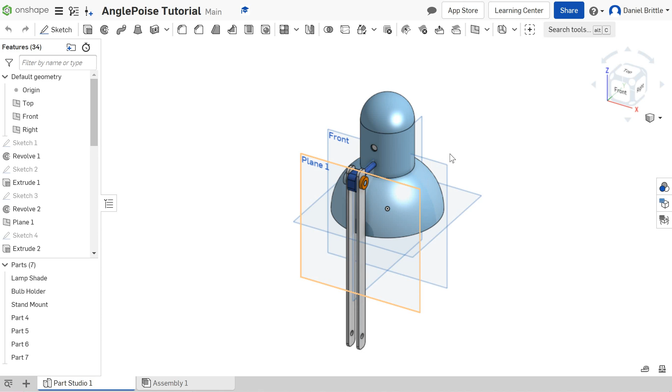In this tutorial we're going to look at creating a lower half of the stand and the attachment that goes onto the base. So to do this, what we're going to do is look at this work face here. So on the side, the inside of the bar that you've already created, we'll create a new sketch and we'll look at it from the left hand side. So if we zoom out a little bit, we'll have the space to create this.

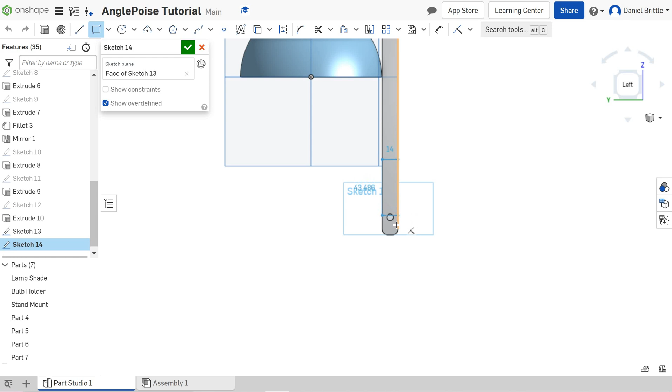Now I want this to be quite restricted, so we're going to draw it within this block. If we then deselect, so right click and escape the rectangle, we can move this lower line out of the way. So we know it's going to become lower, and that way it's going to mean that we have to add less dimensions. So we've managed to snap to these sides on all parts, okay?

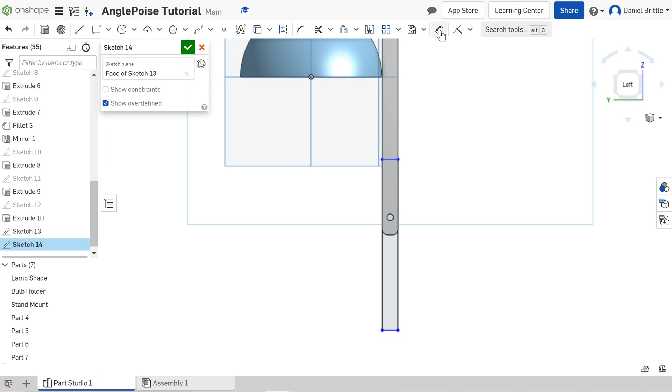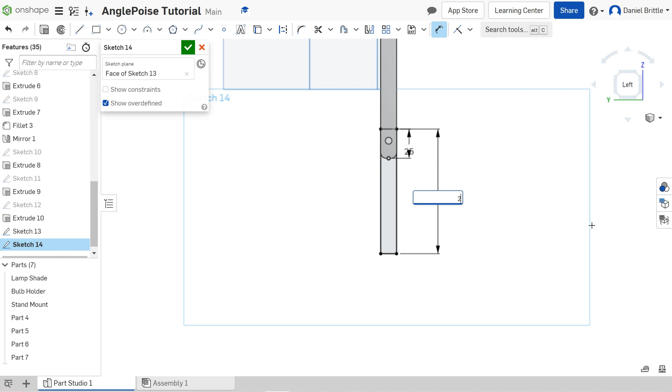So dimension, the distance from this line to this line is going to be 25 millimeters. Okay, so we can see it's just overlapping at the top there. We're then going to make this line here 250 millimeters, and then we just need to put our holes in to match what's already there.

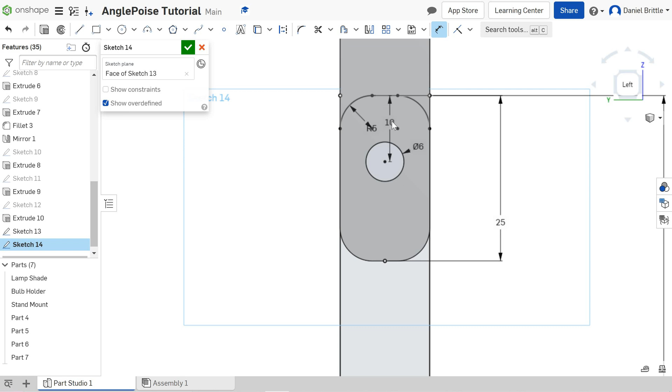So if we zoom in, we're drawing that one and we're giving it the diameter of 6, as with all of the holes on the stand, and whilst we're up here we're going to fillet these top parts. The fillet is 5 as well, so we don't want to change that. Saves us adding the fillets later on, so we're doing it during the sketch. Right, and I just want to check the dimension from the top to there is 10, which is exactly what I wanted.

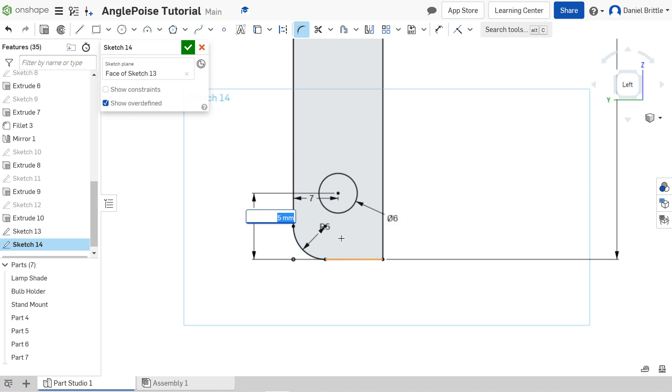Okay, so zooming out and zooming back in towards the bottom here, we're going to draw it the same. So dimension 6 millimeters. There was nothing to snap to, so there's a few more dimensions needed. In the center, which is 7, and then we know it was 10 from the bottom. Using our fillet tool again, click, click, click, so 3 in a row, and then press enter on your keyboard, just making sure they are 5, and you can change them there if you want to later on.

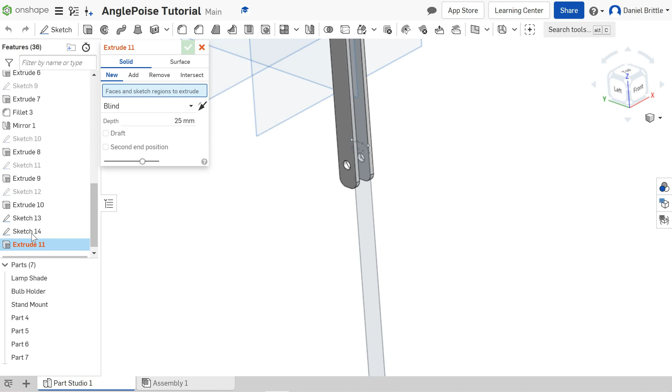So that's now done. I'll finish that sketch, look at it in 3D and zoom in so I can check that my extrude is going to be in the correct position. Extrude, I want sketch 14 extruded, and we can see in there it's going way too far at the moment. We need to change that to 10, and that's the distance of that center part. It's a new extrude, so it's a new part. And click tick.

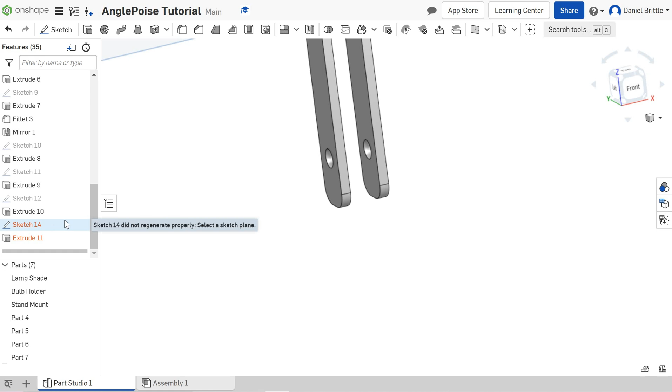You can see I've got an old sketch here as well. It looks like I don't need that, so I'm going to delete sketch 13. It's trying to look after my timeline. Apparently I did need sketch 13, so let's Control and Z on my keyboard and bring that back in. I'm not sure which one that's working to, so that's something for me to investigate later on. At the bottom now, so we've got that as a new part created. You can see our stand starting to come together.

So before we move to create the bottom attachment, we're going to pattern the nut and bolt downwards. So just as good practice, I'm going to name them in this list. So we've got top bolt and part 7, top nut. We're going to create a linear pattern.

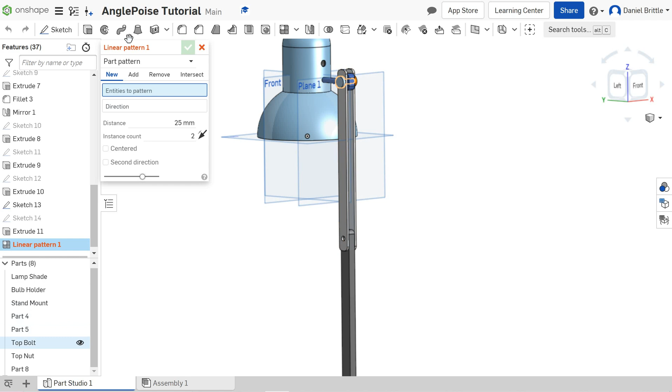It's for a part pattern, which is fine, top bolt and top nut, and the direction, any line going in the correct direction, which is here. If we look at it from the left, we can make sure this is lining up right. I'm going to click the arrow because I want it coming down, not going upwards, and I'm going to guess at the moment at around 200 millimeters.

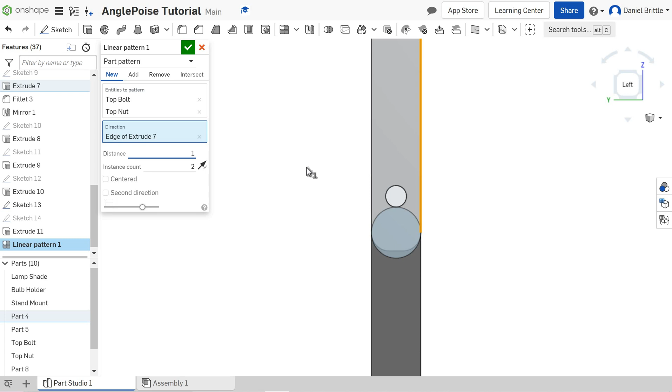So you can see I've missed very slightly, so I reckon that could be around 190. A little bit of trial and error, and that looks like it's spot on. So I'll just check both sides, and it's going through absolutely fine. Tick. You see that you've got the pattern creating that just down here in part 9 and 10. We're not going to do that for the bottom because the bolt's going to be very slightly different.

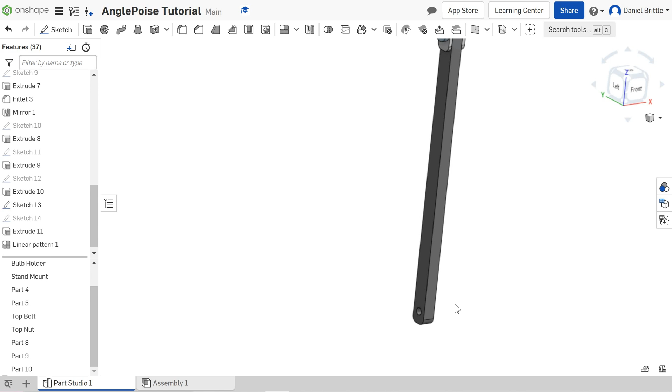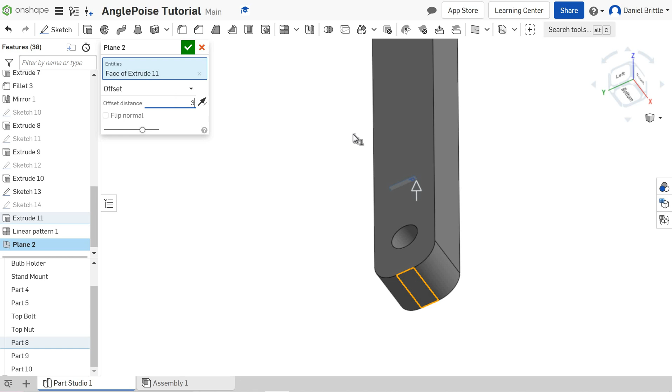We've got to now create the attachment. So to do this, we're going to create a new work plane. We're going to do it about 30 mil above this circle. So it's not too big, but it's enough to play with. So click on work plane. We're then going to offset it from this face. That's our flat face. And we want to go upwards, so we're going to need to flip the arrow, and we're going to go 30 millimeters. Click tick. Our new sketch then is going onto that new work plane.

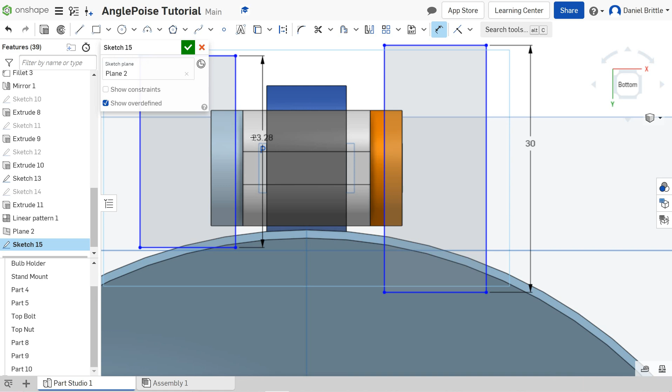We want to look at it from the bottom so it's a bit easier to look at, and we're going to just create two very basic rectangles. So first one on this side, making sure it's not snapping to anything, and then we can dimension them as well. So if we make this 30 millimeters, keeping my dimensions memorable, that 30 millimeters, and then we want to distance it from this edge, so we want them to be touching, so we're going to make that 0. I'm going to make this one 0 too.

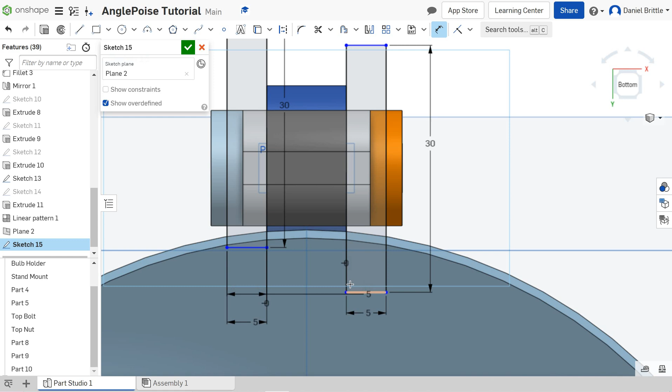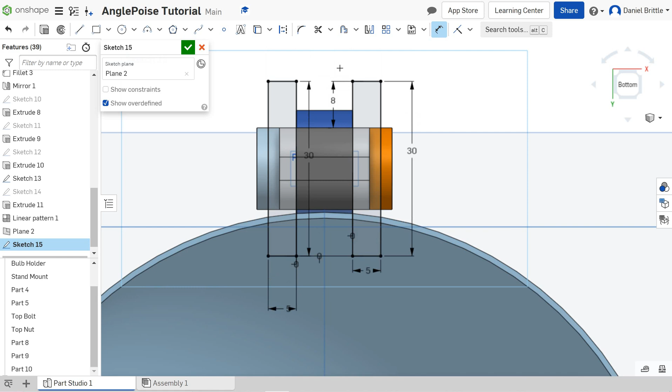The width of these is going to be 5, a nice strong stand, and then we're going to make sure that they line up this way as well, so the distance between them two should be 0. Okay, the only thing now to do is to make sure they're central on their distance from this bar. So we knew that the bar is 14 thick, so we're going to balance that distance out. So 14 off 30 is leaving us with 16, and we halve that to get 8. So that makes sure they're in the centre. We're going to finish that sketch there. So just two well-dimensioned rectangles.

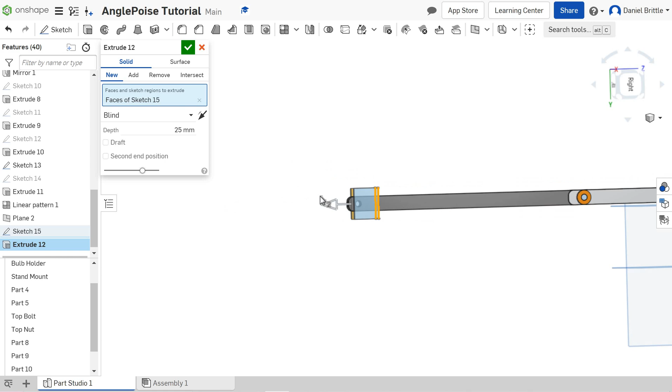We're then going to extrude those as sketch 15, and you'll notice it's going to create two parts. When we click new, they're going to be different colours. It's going to be two parts, which isn't ideal, but I'll show you how to get round that a little bit later on. So that's not far enough at the moment. If we look at it from the right plane, we can see it's not even coming past the bottom. We want a little bit of clearance on there. So if we go 25 millimeters, you should see there's a little bit of clearance, and we can be happy with that extrude. We can come back to add the holes in at a later point.

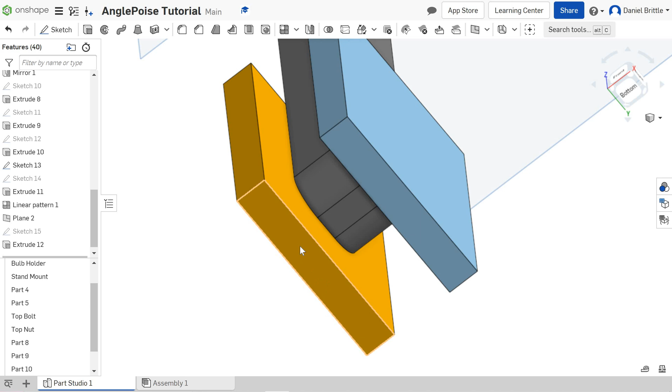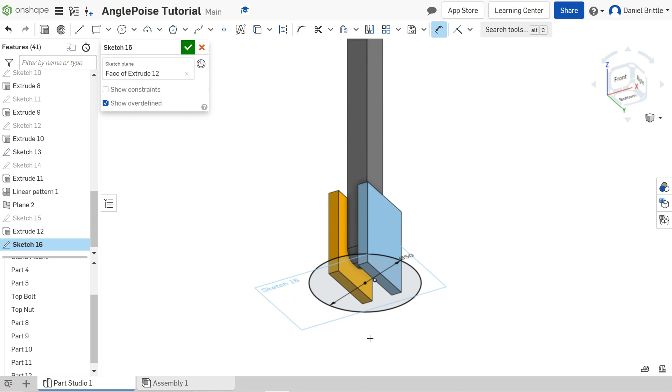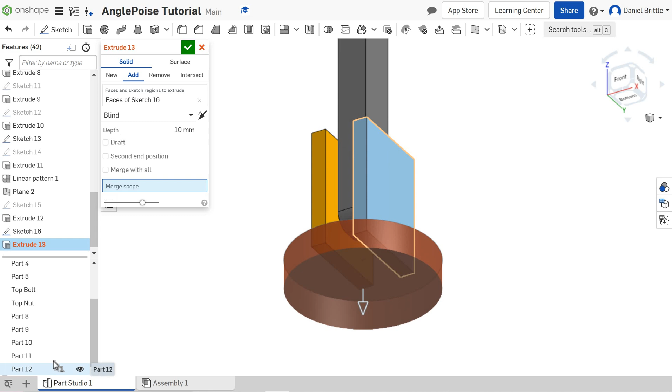We're now going to create on the bottom face a new sketch for a circle, and look at it from the bottom as well so you know what it's going to look like. We're going to go from the center here, a big circle, and we're going to dimension that at 50 millimeters. Okay, and then let's go back to our isometric view and zoom in. Finished that, extrude, and we're going to make that exactly the same, 5 millimeters. In fact, let's make that bottom a little bit chunkier. We're going to make it 10 millimeters, and we've got to tell it that it's sketch 16 that we want. We want it to add to one of these parts. It doesn't really matter which at this stage, and we'll click tick again.

We now want it to know that all of this is one part, so we need to join part 12 and part 11 together. So we'll highlight both in the parts list, right click on them, and we're going to go to Boolean. Okay, that's going to join them. So we've got union, we've got subtract, intersect. You can use it for all sorts.

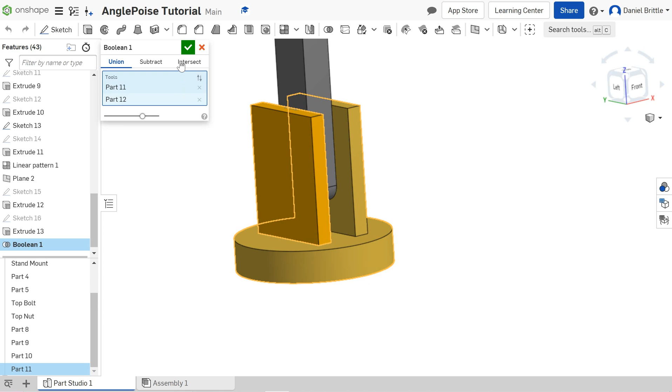In this one is a union because we're joining them together, and that will then create that as one part. We're not far off being done on this now. We just need to create our holes, and we're going to add some fillets as well to make it look a little bit more realistic and how we want.

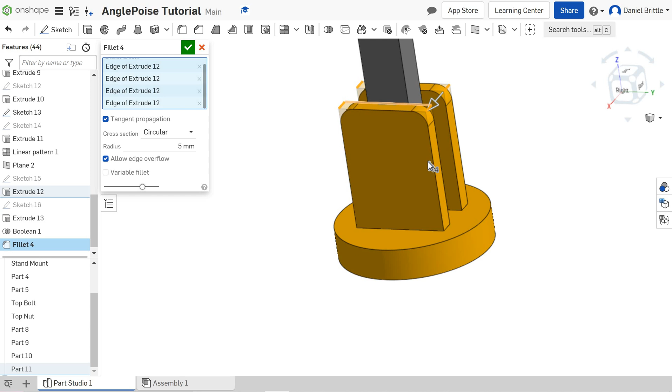We're going to use these edges, and we're going to add a nice big fillet onto these that goes to create a half circle. So we know that needs to be 5 millimeters, and that's done. We're now going to make it look as if it's really strong, maybe even welded together with a tiny little fillet of 1 millimeter, and we're going to do that to the whole of this face. So you notice I clicked the face, not an edge, so every edge associated with that face was filleted.

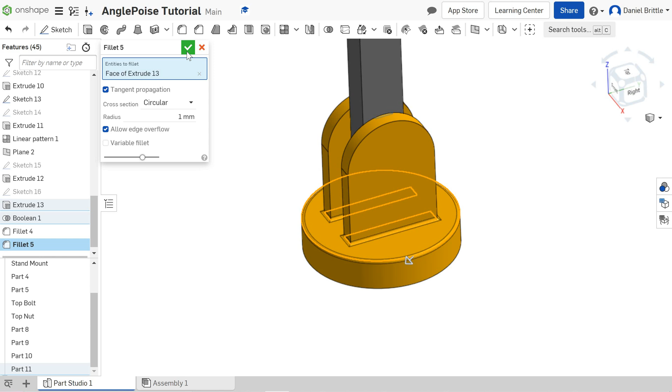And the other two, we're going to do this face as well, and we're going to do this outside face here, and we can click tick. So we're happy with the way that's looking now. The last part to do, well, I say the last, there's two parts actually to do. We need a hole going through here and then a pin coming out that will attach to the base.

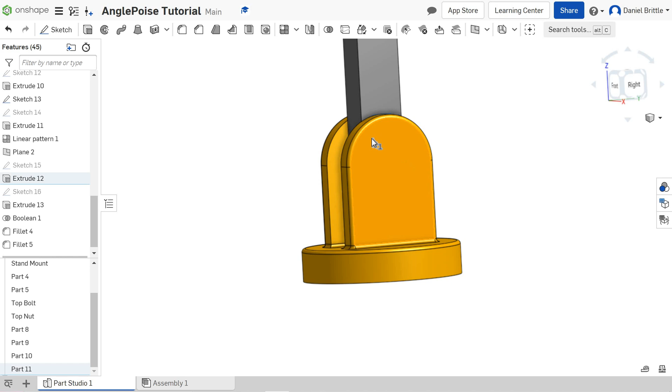So if we click on this face, we're going to create a new sketch on there, look at it from the right hand side and zoom in. And so that we can see what we're working on, we need to change it from shaded to hidden edges visible. Nice and easy. So we know the hole needs to go there. Let's draw a circle and then dimension it so it's in the correct position. The circle needs to be 6 millimeters again.

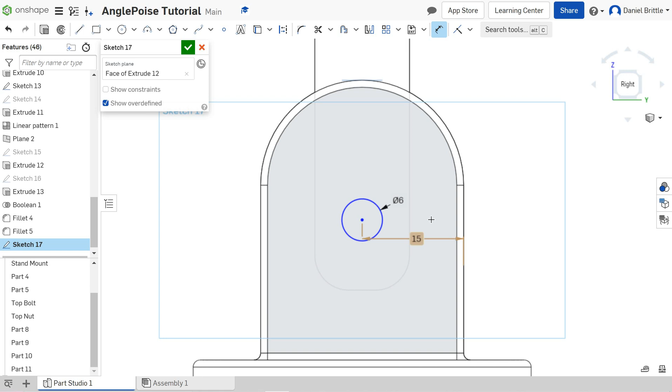The distance from this edge is going to be, that's actually taken my dimension from the edge of the circle. So I could either make it 12 and live with the dimension being there, or redimension it from the center. So be careful that doesn't catch you out. In fact, I'm going to delete that and I'm going to put the dimension in again. So it's from the center of the circle to the edge, and that will be 15. Okay, you can see that it was the same. It's just confusing if you don't check that that is correct.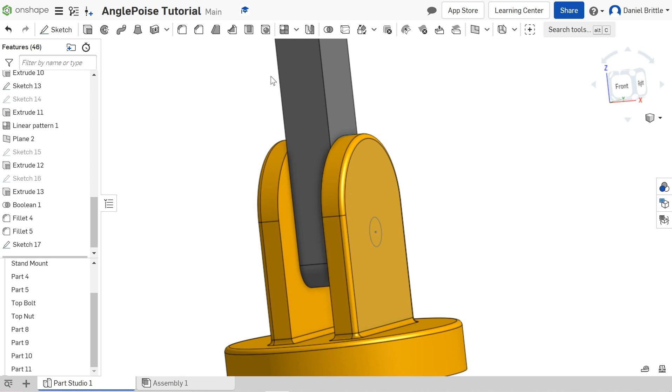So then from the center of this circle to the top of that base is going to be 20 millimeters. Okay, we know that's in the correct position now. We're going to tick, go back to our shaded view and make that more 3D so we can see that our hole is actually working. Extrude, click on the circle. We want it to go the other way and we want it to remove. And then the merge scope is with part 11.

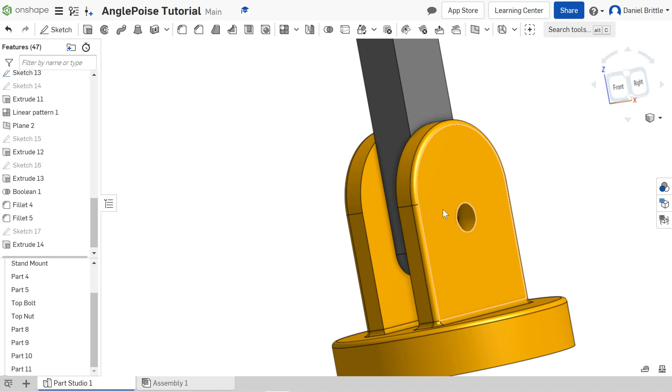Just check both sides. We're going to change it. Instead of having a dimension, we're just going to say through all, so it knows that it's creating the hole in both parts and we know it's there. We'll come back to put the nut and bolt into that in the last tutorial. The next tutorial even, let's not put a limit on how many we might end up with.

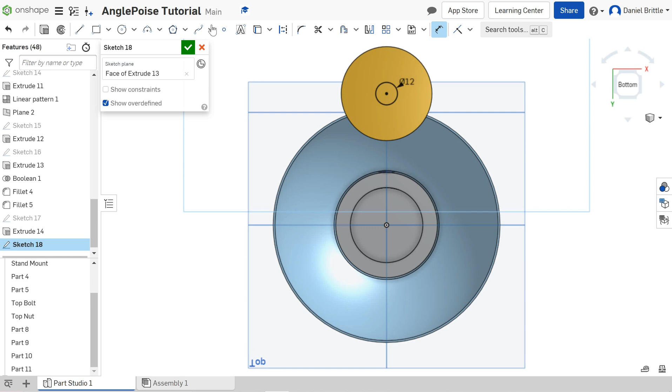We're going to put now the pin to attach to the base. So click on the bottom of this attachment, view from the bottom, start a new sketch and draw a circle. We want it in the centre of this one. This is the world's easiest part. And we're going to make that a 12mm diameter circle, a nice robust pin that's not going to snap by accident. Turn it into a 3D shape.

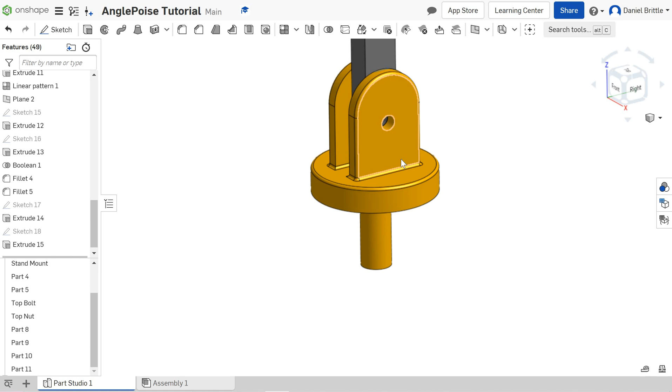Extrude the pin and we're just going to make that 30mm. Click tick and that part is now finished. So there you go, a fairly complicated engineered component there. All that's left to do is put the nut and the bolt through to hold that stand in place, and you can see we're starting to really get there now with our lamp.